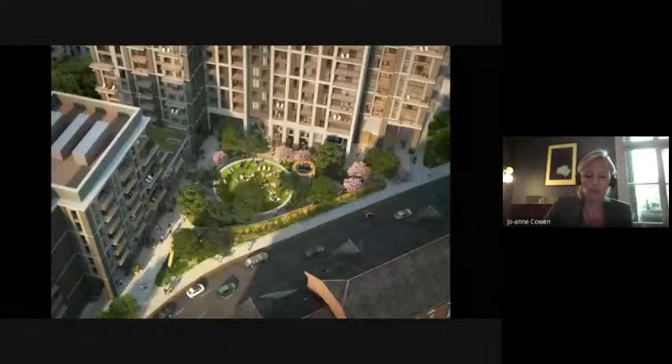And ultimately, this shows probably the key visual for us and what we've been trying to achieve, which is a really enhanced strategy for looking at this as a comprehensive, regenerative redevelopment of sites that sit in close proximity to Kingston Station.

I'm going to keep this presentation quite expedient. In the first instance, I'm going to discuss the scheme and the strategy in relationship to the North Kingston Development Brief, and then go through the sort of massing, height and changes that have taken place since that, and some of the design changes, all of which have had extensive input from the case officers and the design officers and the overall planning team at Kingston.

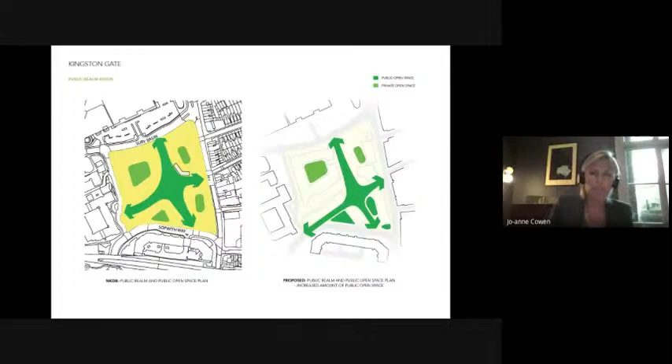The public realm vision is critical for us. I think no regeneration scheme can ultimately be successful unless it thinks about what happens at ground plane - how do people use and move through a site, and how do we look at opportunities to create enhanced public realm and pedestrian, cycling and active movement corridors within a site? And the North Kingston Development Brief vision was very much to do that. They were looking at east-west, north-south routes through the site, and then sequences of green spaces.

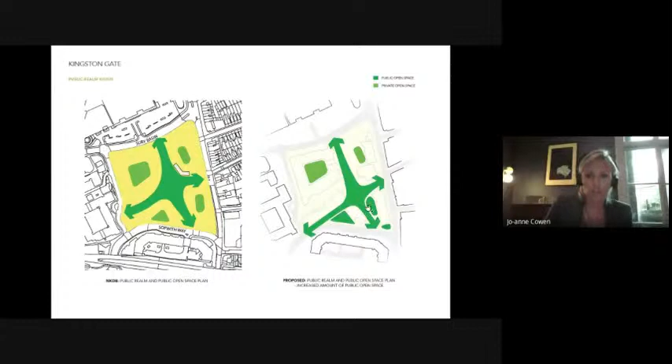Ultimately, the scheme that we've developed in relationship to Queenshurst, the college, and Richmond Road and the Canbury Car Park has sought to do that. It's sought to promote that north-south access. However, we're starting to look in slightly different ways at the way we locate public space.

One of the key aspects for us was when we were looking at the North Kingston Development Brief - this was ultimately the outline form that was referenced in the brief or guidance document. One of the key aspects that we did have struggles with was actually building hard up against Sopwith Way because of the nature of that environment. We felt that would actually have a negative impact in terms of air pollution and quality of space.

And instead, being south, we sought to address this by looking at a way in which we could open up, create some public space there, create a better environment for the wider public benefit, and in so doing look at relocating height to this part of the site, which, whilst not strictly in accordance with the guidance of the brief, ultimately is the location that the brief also saw as most appropriate for height and scale on the site.

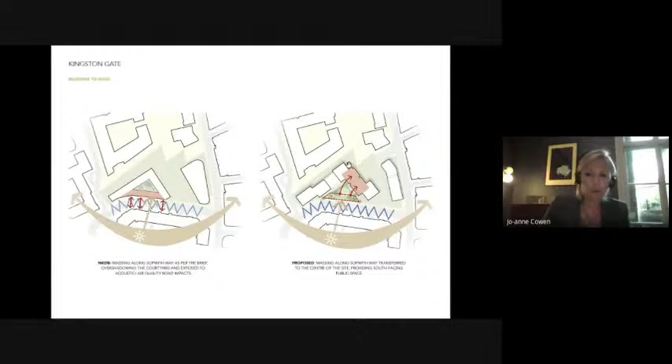In terms of where we got to at the previous submission, and some evolution has taken place from this, looking at the ground plane for the site, where 58,000 square foot of public realm and public open space builds on the good work that's been done on the north-south linear park, but looks at how to unlock a triangular sort of junction point right next to the station.

And see how could we redevelop this, and how could we take the opportunity to provide a mixed-use scheme that was most appropriate at ground level in the first instance to the appropriation of successful spaces and successful places, not just for the residents of this development, but for the wider North Kingston itself.

As part of this, we have over 55% of the site given over to public realm and job creation. We have co-working hubs, gyms, a nursery facility, retail spaces, as well as 389 homes above, 137 of which would be affordable.

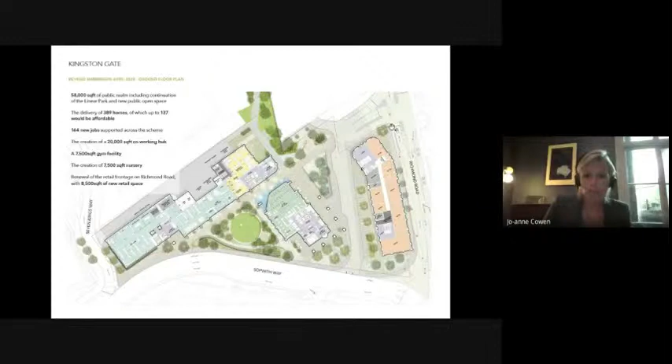We ultimately looked at how we could pull development back away from Sopwith Way and the approach if you're coming from Kingston Station, building a sequence of public spaces, both Sopwith Gardens, which have had extensive work done by the case officers and design officers looking at the quality of that public space, as well as the Walter Street Gardens and the relationship to the proposal for Richmond Road, providing and replacing with new retail as well as apartments above, and thinking about the benefits of setting back and pulling the scheme in to set it appropriately within the overall context.

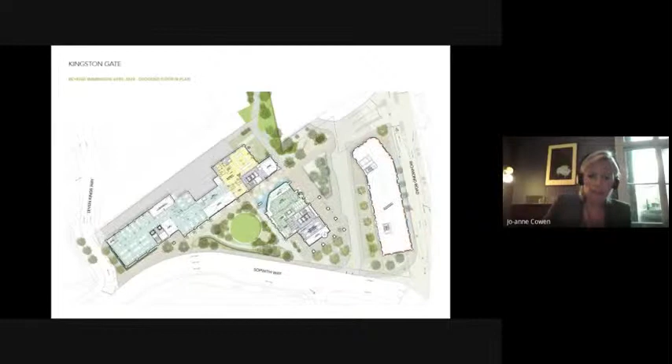At mezzanine level, we again have an extension of the functions - the nursery, the co-working, the gyms - and then the lobbies for the residents.

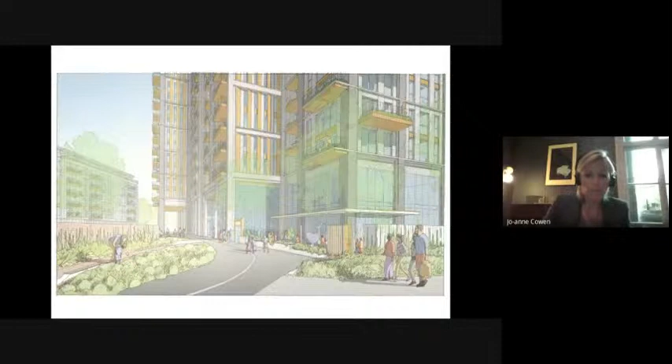In terms of real development that's happened since we last presented to you towards the back end of last year, a lot of work has been done with the design and with the officers to look at the benefits to the north-south linear park that runs up past Queenshurst, the inclusion of the nursery, and how we balance out what's happened at the space alongside the college, looking at this as a balanced but urban environment that moves down towards the station, successful at ground plane and for people as they pass through the site every day.

I think we have evolved some of the CGIs of the scheme. This scheme looks at Sopwith Gardens, so it's looking at the space behind that articulated acoustic green wall that provides separation to Sopwith Way.

These are public gardens. We're replacing trees across the site at a ratio of 4.5 to 1, so 55 new mature species are coming into site. What you can see beyond here is the Queenshurst development and the alleviation given to that development looking through, and then the east-west route that runs past the co-working space.

Being able to create flexible hub workspace is ever more relevant in the post-COVID environment that we live in. Work has been done as well to the facades, but I'll come onto that as we go through.

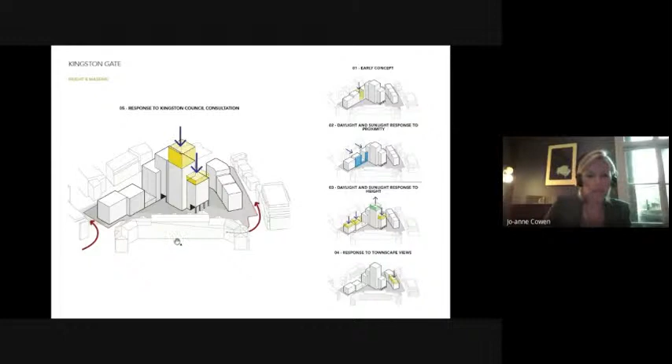There's been quite a lot of work, and I won't go into too much detail, looking at the breaking down of the facades into smaller elements, reproportioning parts of the facade, and emphasizing what is an amazing amenity level.

So it's the community spaces, the amenity spaces that sit ultimately at this level across the building, which are there for the residents of that building. This is a build-to-rent scheme. It's about creating affordable and accessible apartments that ultimately have a community within them and have a huge amount of amenity and facilities for those residents, such as co-working spaces, lounges and meeting rooms, really trying to adapt to a much more modern way in which we live and work.

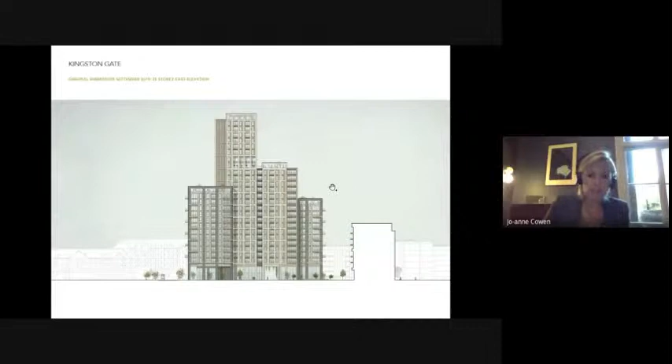In terms of the original submission, this ultimately shows the build up to the 25 stories, and the way we looked at sort of vertical fins and banding. We looked at verticality to this building as a defining feature of it, in locating North Kingston and creating a sort of landmark for it.

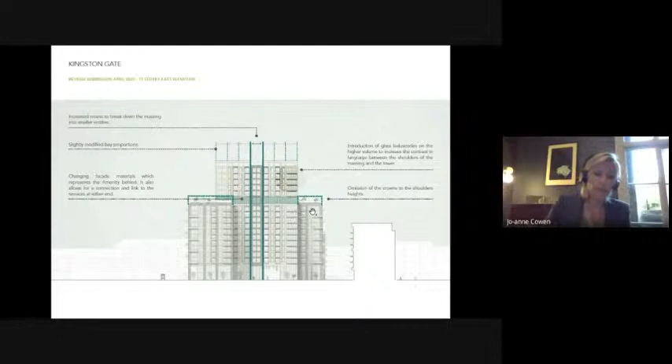In terms of the revised proposal, we've done significant work to move away from that, in the fact that we want this to maybe settle more as a series of effectively buildings and residential blocks that ultimately relate to one another and to the ground plane. You see that deep recess that gets pushed through the middle of the building, which enhances the dual aspect, and the proportions of the facade start to change, as well as a reduction in them with these north and south terraces that are very beneficial in terms of the amenity offering and the quality offering to the residents.

These start to demonstrate the different bay and facade details, particularly when considered to lightening some of the materials, and that was particularly prevalent from the view from the Market Square towards the building, a softening, and then looking at that different combinative play with different materials, the quality of balustrades, the quality of space.

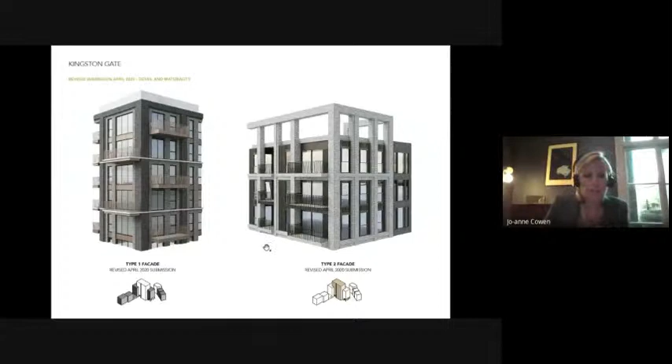And go back to those principles of the development brief. We've looked at a north-south and an east-west linear route. And again, then really just to finish, looking at the opportunity that we believe is being achieved by this mix and ultimately by this proposition in terms of benefits at ground plane.

We do think it could be an amazing space and will be an amazing space, and hope that residents ultimately can understand that the basis of what we're trying to do is inherently about creating a high quality scheme that's absolutely rooted in the ground plane in Kingston, and provides an immense benefit, not just from jobs and work and space and place, but also in the creation of new homes, which is something we all need to do across London. We need to provide new homes, and this site sits as an opportunity area, and in our mind is appropriate for this.

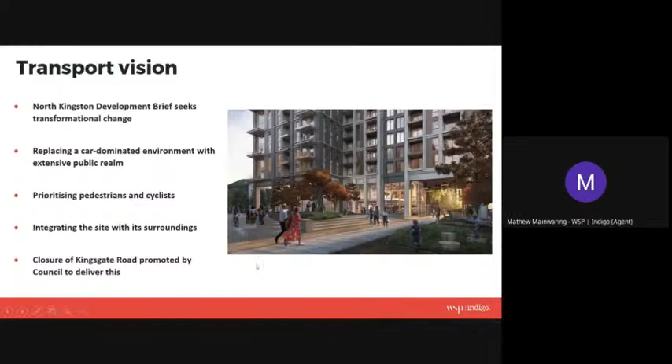As part of promoting sustainable travel, this development, I suspect, is somewhat unusual in being totally car-free. Most schemes that have come forward in Kingston over recent years have included a variety of parking provisions, including the Queenshurst development, which has recently been completed and has a large basement car park. This proposal is probably class-leading in trying to be entirely car-free and deliver on that public policy agenda of reducing reliance upon the car in areas which benefit from high public transport accessibility levels. We are putting some blue badge parking into the basement to be fully compliant with accessibility requirements, and rather than the usual 40% standard for active electrical charging, this scheme is putting in 100% active charging to those car spaces, so each blue badge space will be fully functional for electrical charging. In accordance with planning policy, we're also accommodating cycle parking provision for 766 cycle spaces.

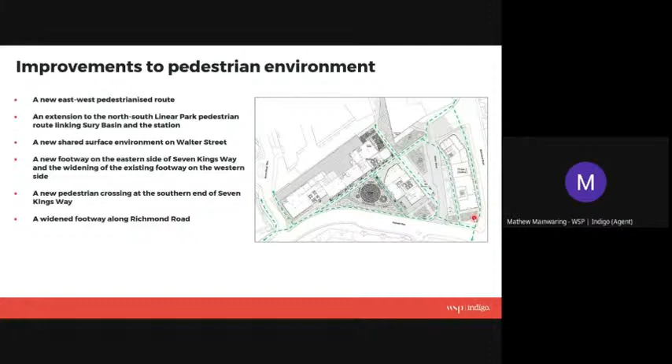By way of how the transport proposals have evolved, it's worth casting our minds back. Prior to this planning application, the council itself, as part of its desire to bring forward comprehensive development on these sites, had undertaken a number of its own transport-related studies to help inform the principle of stopping up Kingsgate Road. We've taken those studies forward with a huge amount of transport assessment, and engagement with both the council's transport team and Transport for London, who have an interest in the proposals.

In terms of two key changes since the submission of the application last September: as I briefly touched upon, we've sought to realign the bottom of Seven Kings Way as it joins Sopwith Way, predominantly to give more priority to pedestrians and cyclists crossing at this junction, but also to significantly widen the footway to provide more relief to the apartments in Royal Quarter, as well as stepping back the building so that we've got public realm and new soft landscaping on the eastern side of Seven Kings Way.

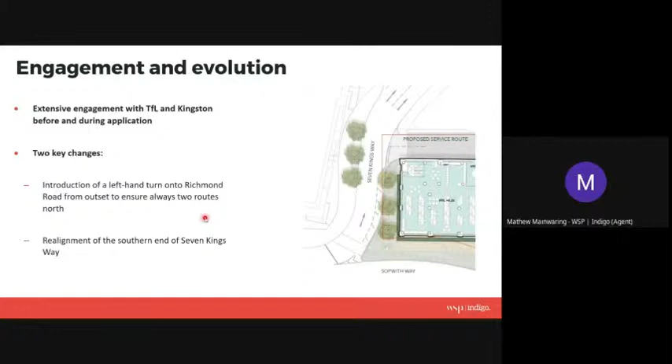The other key move has been to bring forward a new left turn from Sopwith Way northbound onto Richmond Road, as part of the phase 1 works to the scheme. So those are two quite important changes we've made from a transport perspective with regards to vehicular movements.

The combination of hard and soft landscaping proposals are really going to put pedestrians and cyclists in the predominance as far as movement through this space is concerned. We will also create facilities for drop-off and taxi drop-offs through this area. But this is not going to be designed in any way to encourage traffic, through a combination of the design of materials and surfaces and access into this area, coupled with signage elsewhere through the town centre.

Then the left turn at this junction is going to be provided at this point, rounding the corner to create one lane of northbound traffic and still two lanes of southbound traffic on Richmond Road. Those will come in as part of the phase 1 proposals, albeit that during the phase 1 works vehicles will be limited to 7.5 tons.

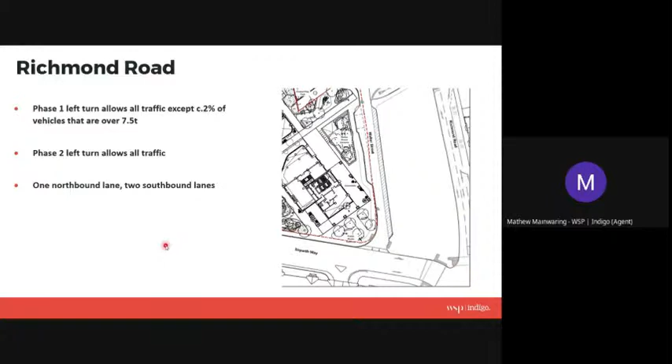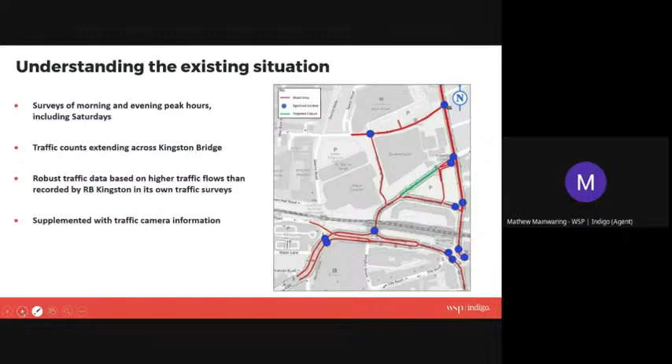You can see that modelling and traffic surveys have taken place on all the key junctions in the area, and we've built in some pretty positive, significant growth assumptions, which are beyond really what the level of traffic growth has been in Kingston over the last 10 years or so. But we've gone to quite significant lengths to give the worst case scenario, and demonstrate that it can work in those situations, in terms of the way that the traffic moves on Seven Kings Way and Sury Basin. We've tried to take a completely robust approach and listen to the feedback provided both from TfL and from the council's transport team.

This is looking in a little more detail at some of the assumptions I've just mentioned - quite exaggerated levels of transport growth. To put that in context, if you look at the growth in traffic that's been happening in Kingston over the last 5 or 6 years, generally it's been very flat, or a very slight increase, below the level of growth that had been predicted in the previous set of modelling.

But we haven't just taken that at face value. We've tried to go a considerable step further in discussion with the various departments at the council, and factor quite a large degree of growth in, modelling the amount of traffic that's going to come forward potentially from other developments as well. It's important to note that the scheme itself is going to be putting very little additional traffic - only the 18 blue badge spaces, which is effectively de minimis in traffic terms.

So the scheme itself is very positive in terms of not putting any meaningful net additional traffic onto the network. What we're trying to demonstrate through the very extensive transport assessment, which runs to over 400 pages and accompanies the revised submission, is how the existing traffic and its growth scenarios will be accommodated on Kingsway, Sury Basin, onto Richmond Road with a new left turn, and also through the rephasing of the traffic lights.

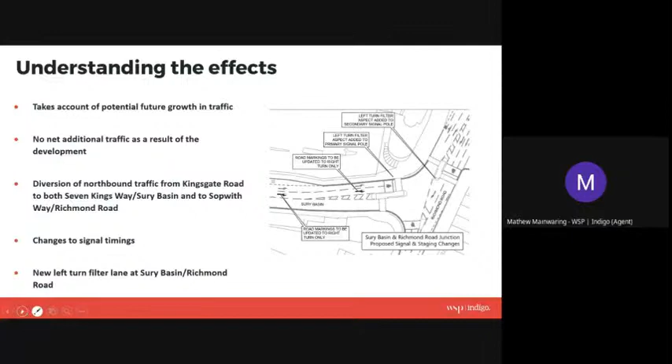In terms of public transport, there's an existing bus stop on Kingsgate Road which is being stopped up, and that's being relocated to Sury Basin, with more being made of that bus stop. That complies with TfL's public transport standards in terms of the 400 metre spacing between bus stops, which was an important factor. That was discussed, and TfL have inputted into the way the Sury Basin bus stop will be provided. We've agreed that proposal with them, and no doubt they will comment in due course as part of the formal consideration of the application.

Northbound journeys on buses are going to be slightly longer as a result of stopping up Kingsgate Road. However, that increase in journey time will be less than 1 minute, which is Transport for London's rule of thumb when assessing the impacts of new development in particular parts of London - so we're well within the normal expectation of what TfL would expect. As far as southbound journeys down Richmond Road are concerned, they'll be slightly quicker than currently, so there's a slight netting off and a slight improvement in movement through Richmond Road.

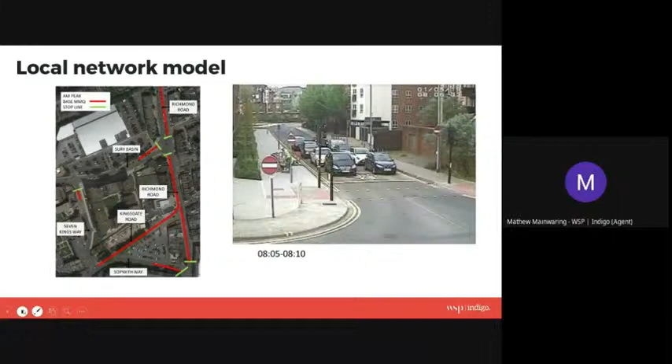Now, the queue length, as I mentioned earlier, is circa halfway down Kingsway. I have to say this is the worst level of queuing, taken at the peak of activity during the morning, which happens at circa typically around 8:05. At other parts of the day, before or after that, the queuing is a lot less, more typical of what you see on this side of the image. So this is the modelled peak in terms of the level of queuing, but it never gets back all the way down to the junction with Sopwith Way, which I know was a concern previously in some of the representations that were received.

You do see some queuing increase on Sury Basin here. You're seeing the removal of traffic completely on what is currently Kingsgate Road, and the complete priority given to both pedestrians and cyclists along that, as part of the transport objective of improving pedestrian and cycle connectivity, both east-west and north-south. You do get a slight increase as well in queuing on Sopwith Way as part of the gyratory.

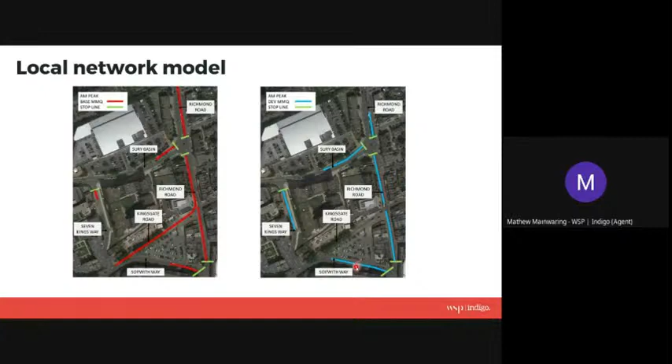Now I'm going to try and play you some modelled micro-simulation videos, so just bear with me a moment as I come out of this presentation and into some models. This will take a second or two to load. What I'm going to show you is, if you like, the worst case scenario taken at 8:02 on a weekday morning, just to give you a sense of the reality of some of the data that sits in the transport assessment. This is a visual representation of all the numbers and analysis that has been taken.

Mr. Mainwaring, I think you need to close down the presentation and start again, and change the window, because at the moment we're only seeing the PowerPoint presentation. I think you need to end the presentation and then start again and pick the particular window with the video on it so everyone can see. Thank you very much for that.

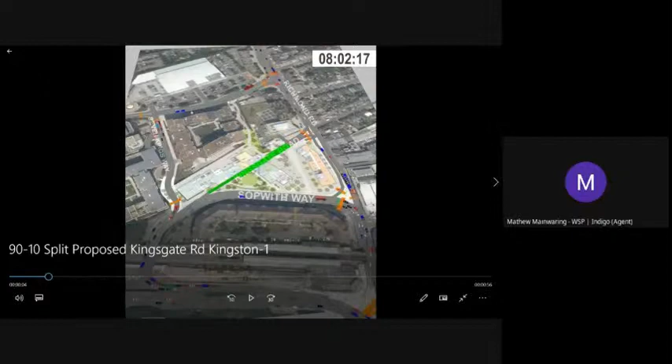I'm just going to let this video play for 60 seconds or so, just to give members a feel for the movements. There's quite a lot going on in the video, but 7 Kings Way is obviously here, Sopwith Way to the south, Sury Basin in front of Sainsbury's and Queenshurst, and then you've got the Richmond Road coming down on the eastern flank of the scheme. So I'll just roll the video at this point and let you watch that.

So you can see here now we've got a red light at the junction with Sury Basin and the vehicles starting to queue. The red light changes to green and the vehicles are released and move over onto Sury Basin and the junction with Richmond Road. This is now the greatest level of activity in terms of the morning peak, coming up to 8:05 in the morning.

This is obviously a speeded up video, but you can see the clock ticking in the top right hand corner. What it demonstrates quite clearly is the extent to which the movement continues really quite successfully, recognizing what I showed you in terms of the diagrammatic queues earlier.

So I'm just going to come out of this slide now and take you to a different level of modeling. I've just shown you the worst case scenario there. I'll stop sharing again and just come back into the...

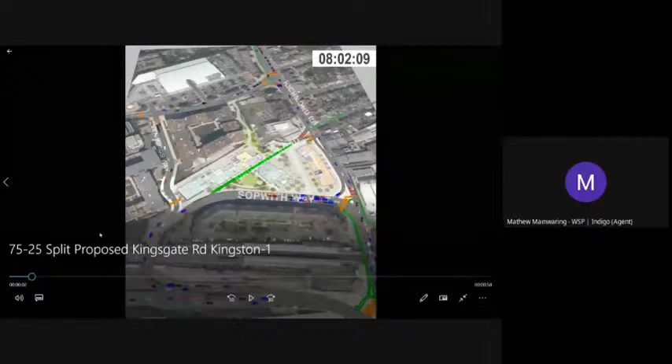So you can see what's happening on 7 Kings Way here, and then Sury Basin as well. What this shows is queue lengths being shorter than we showed you in the worst case scenario. Again, all of the junctions, whether it's the junction here with Sury Basin or with Richmond Road, are all working successfully, and obviously the southbound flow on Richmond Road as well.

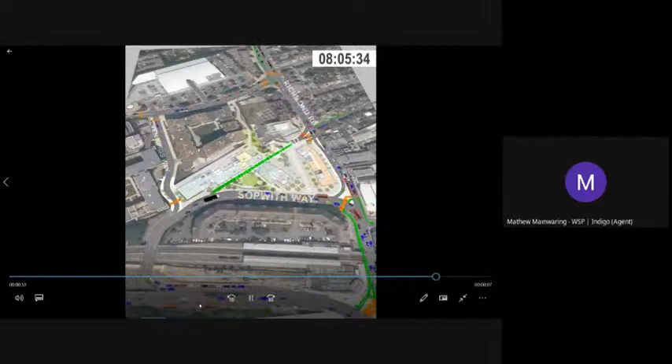I think the reality of the situation is that the actual movement itself is probably going to be somewhere between these two scenarios. So we've just got another 8 seconds to play on it.

Okay, so that covers off what I wanted to update the committee on in terms of changes to the transport aspects of the scheme, and I hope that's been of some benefit to bring to life some of the rather voluminous pages of analysis included in the application bundle, which we appreciate is difficult to comprehend, but is required in terms of making sure the evidence and analysis is there to support the proposals in the planning application.

We'd be delighted to take any questions and clarify anything that wasn't clear during, and I appreciate there's quite a lot to take on board in that presentation. Thank you very much.